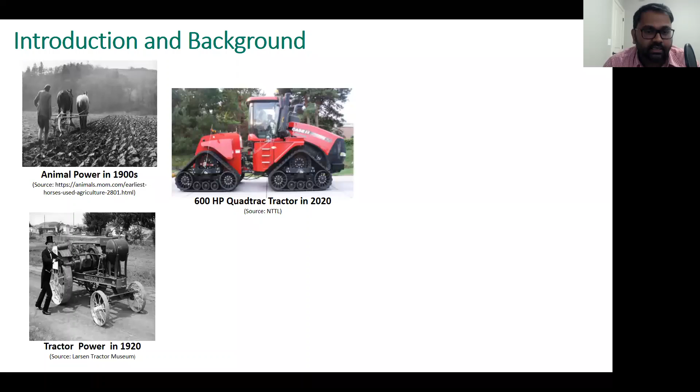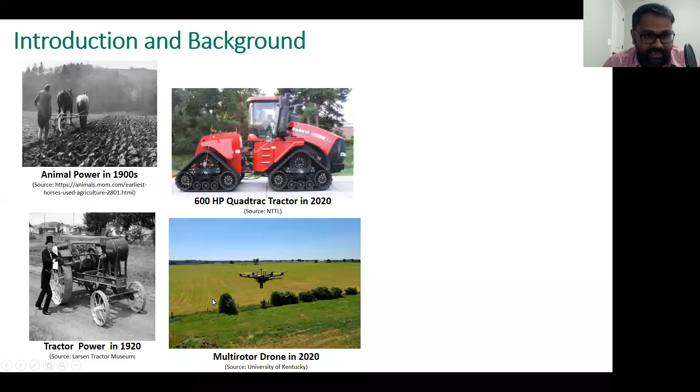Today machines that are offered come with the option of connecting to the cloud, and also these can do auto steer very precisely with RTK GPS accuracy. We're also now using drones or unmanned aerial systems that can easily fly over fields to observe crop conditions, look at crop corn plant stands, and we're also using them for weed identification. So those are some of the examples.

So how are the machines going to look like in the future? We are looking at machinery, something like these on the top right. There could be robotic machines, some of them smaller machines that can go underneath the crop canopy, and some of them high clearance robots. There could also be drones that are actually spraying in the fields. Here you can see an example of a weeding ground robot in a vineyard.

And these are just very few examples of many robotic platforms that are under development, both at research institutes, but also in OEMs and startup companies. There's a comprehensive list of these robotic platforms at the link here.

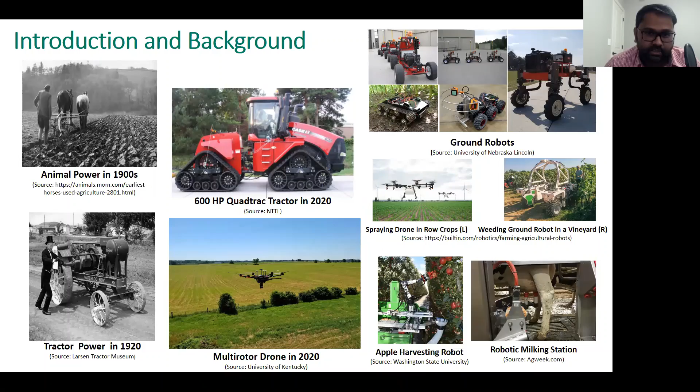When we look at orchard crops or specialty crops, we have apple harvesting robots and robotic milking stations. So as you can see, there are a variety of robots used for both crop production and animal agriculture. Here's a broad classification of agricultural robots.

These are divided into unmanned ground vehicles, unmanned aerial systems, and robotic manipulators. UGVs are used in both row crops and specialty crops. UAS are used primarily for sensing, but now we're looking at spot spraying or targeted chemical spraying. Robotic manipulators are predominantly used in greenhouse and phenotyping applications, livestock, and specialty crops. Robotic manipulators are nothing but robotic arms.

Robotic milking stations are a mature technology that have been used for many years. So you could see a combination of these robots. For example, a robotic manipulator could be mounted in an unmanned ground vehicle for automating field operations.

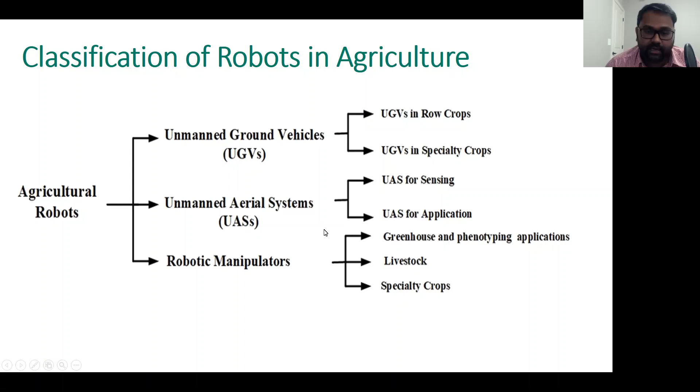Some of the computing is happening on the machine itself or edge computing devices, and some computationally intensive operations could be happening on the cloud. We have robotic manipulators that could be inside the barn, milking the cows, but also providing feed delivery or phenotyping the animals. So as you can see, there is a variety of robots that could be part of the connected farm of the future.

So where we are today with this vision, companies are offering autonomous grain cart solutions. As you can see here, this is a good example, a tractor pulling a grain cart, a typical 200 to 300 horsepower tractor. As you can see, there's no operator. The idea here is the combine operator can summon this autonomous grain cart so that you can autonomously transfer the grain and unload it at the edge of the field.

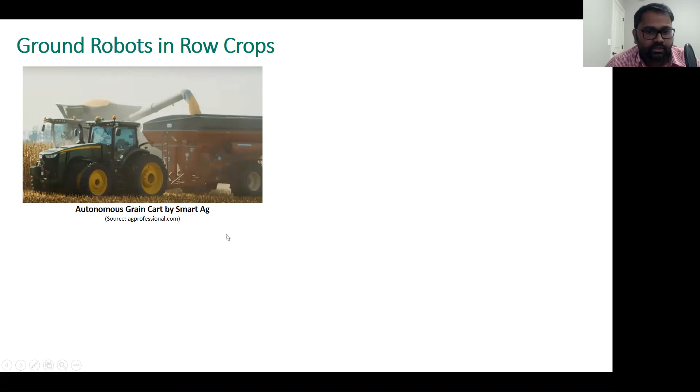So there are machines being offered that don't look like typical tractors. This is the DOT platform by Raven, a modular machine. You could use multiple operations with this type of machine. These two machines are in the range of 200 to 300 horsepower. So we're talking about high horsepower machines getting fully autonomous.

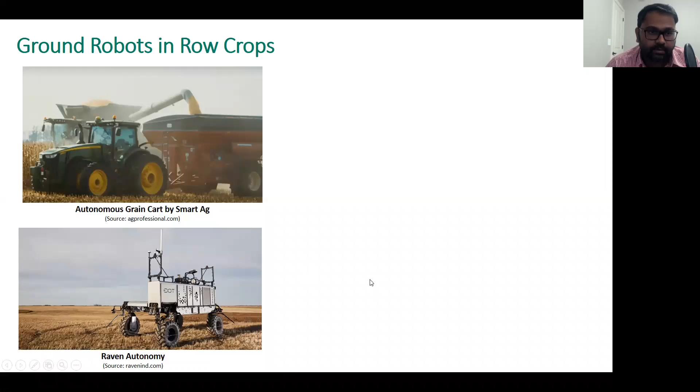There is work on the research side too at research institutes, and one example is this robot that we are working on at University of Nebraska-Lincoln. There are many robotic platforms that researchers are working on, which are electric machines. This robot has a 60 horsepower internal combustion engine—a more practical field platform that we are trying to develop.

This is used for collecting soybean plot information. Here we're using it as a phenotyping application. But since it has 60 horsepower, we could do other operations too with this machine.

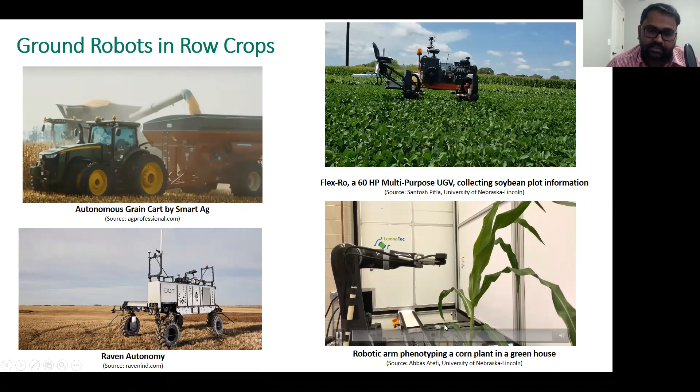We also are using robotic manipulators to phenotype corn and sorghum plants inside the greenhouse. The idea here is you can place this robotic arm next to a conveyor belt, and then we can do in vivo sensing. So here, this robotic gripper is sensing the chlorophyll content and the leaf temperature.

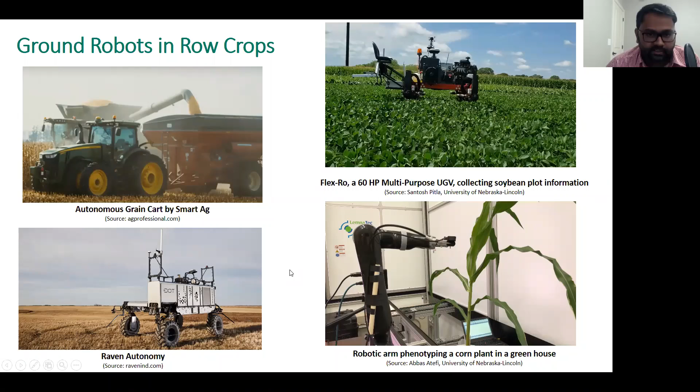So as you can see, there is work both from startup companies and OEMs, and also at research institutes on robotics for row crops.

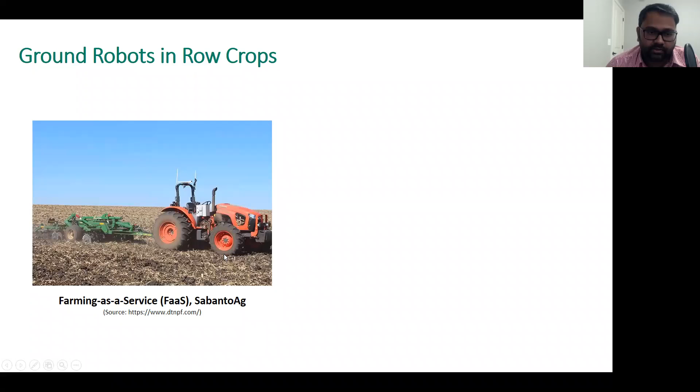So we are moving towards small autonomous machines. Here's a good example, this is by SabantoAg, a small robotic tractor. And then here we are using a swarm of machines, multiple ground robots. The idea here is replacing one big machine with multiple smaller machines.

And the motivation for that is the ability to reduce risk. For example, if you have 10 machines working in the field, even if one machine is down, the remaining 9 machines can still work. So that's how you're managing risk. There are also benefits in terms of reducing soil compaction. So that's been the motivation to go small but use multiple machines.

And something that is coming up is farming as a service. So instead of the producer buying these machines, these companies are offering this as a service, like a custom operation.

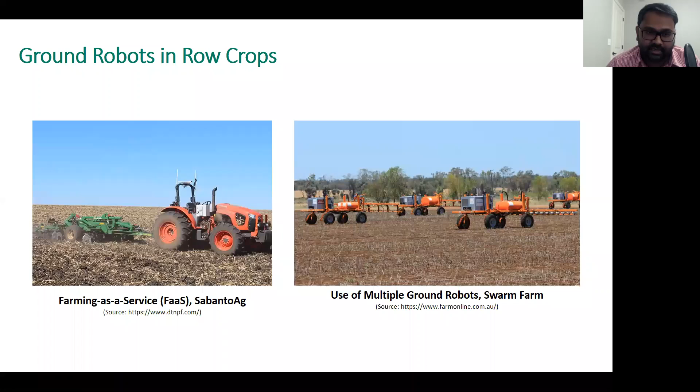In terms of aerial robots in row crops, predominantly we have seen work in the area of sensing crop and identifying crop stress. Here's an example: a multi-rotor UAS collecting information from soybean plots.

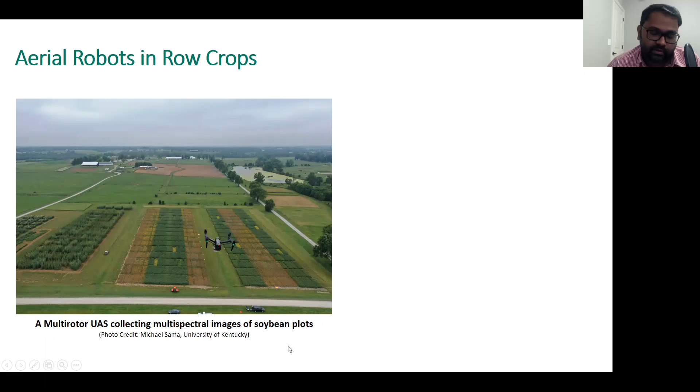UAS has been used for corn population counts and weed identification, with a lot of machine learning and AI techniques used to differentiate between crop and weeds. With the increase, UAS are advancing at a really fast pace, and now companies are starting to offer drones that can actually spray, handling higher payloads.

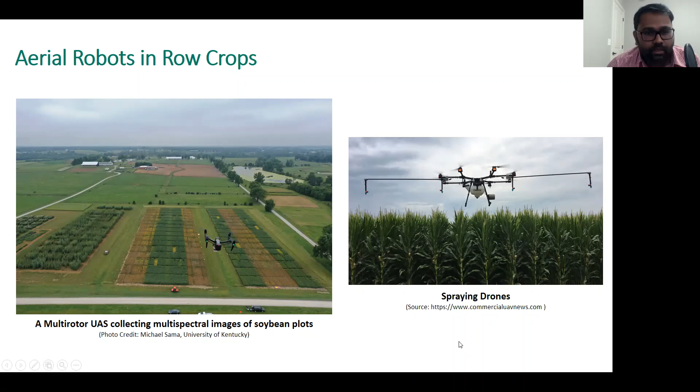When it comes to robotics in specialty crops, like orchards, one of the biggest challenges is availability of seasonal labor for harvesting. So there's a lot of work in automating the harvest process or fruit picking. In this example, a robotic manipulator is mounted on a ground vehicle, which could be a ground robot too, that gets close to the tree and the robotic arm picks the apples.

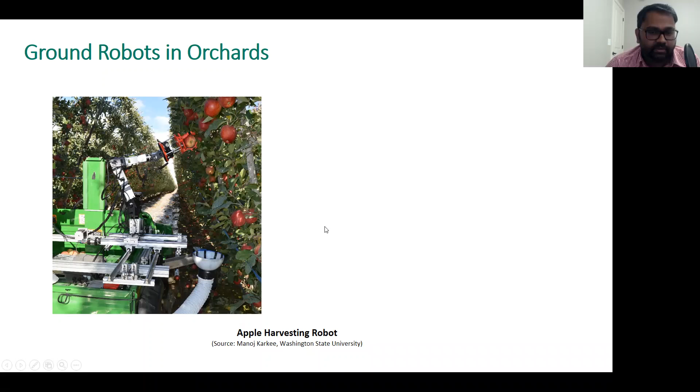One important thing is when you're picking, you shouldn't damage the apples, so you have soft grippers. Another challenge is occlusion, which is one fruit being in front of another. The machine has to use really good algorithms and machine vision techniques to differentiate between the two fruits and pick the fruit. Because of this computationally intensive process, these robots are still slower than human labor - humans still pick faster than robots can. That's been a challenge.

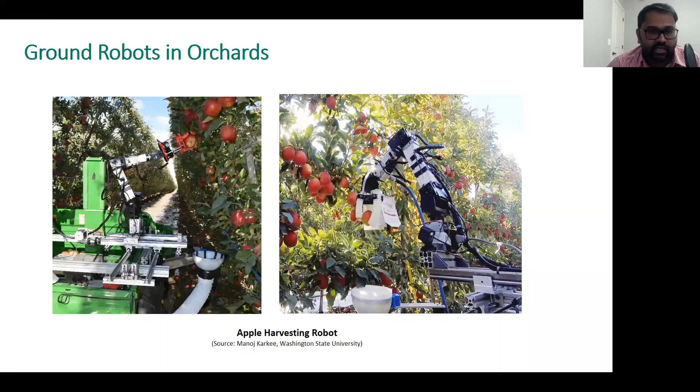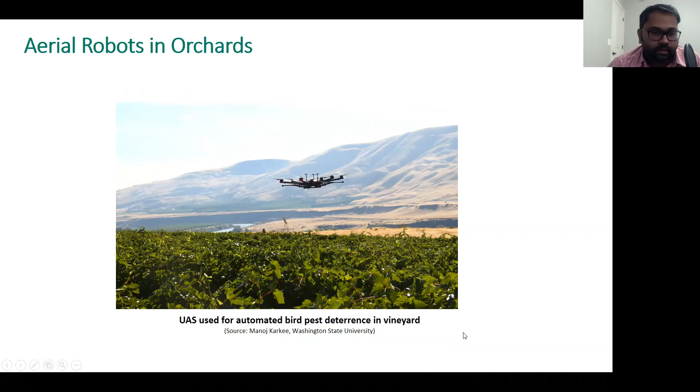UAS are used for some specialized applications, such as this UAV trying to deter bird pests in a vineyard. With the advances, there are a lot more applications coming up using UAS for crop production.

I'll go over some challenges here, for ground and aerial robots in row crops. The technical challenges include designing effective control architectures and AI algorithms, not only for operating one individual UGV, but also a fleet of UGVs. How do we distribute tasks among multiple UGVs? Are they doing the same tasks or different tasks? There could be humans in the loop, or without humans working with the robots.

There's a lot of work, and this has been a hot research area. And designing and deploying robots to work faster and more gently than human labor when interacting with both plants and animals.

Some socio-economic challenges include the fear associated with robots in terms of replacing human labor, and also what is the economic feasibility of both large and small acreage farms - a large producer versus a small acreage producer. What is the economic feasibility of robots? And then liability, security, and data privacy concerns associated with ground robots. These are still up and coming, so there's still a lot of work needed in this area.

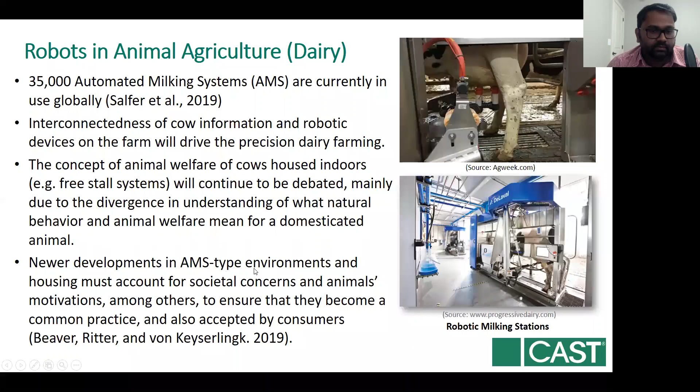In terms of robotics in the animal industry, there are 35,000 automated milking systems. Robotic milking stations are a very mature technology and have been used over many years. One issue in this area is the debate on animal welfare of cows in indoor environments. Hopefully automated milking stations will take into account some of these societal concerns as we move forward with deployment.

Coming to the poultry and swine industry, robots are being developed to pick eggs laid on the floor, and also to turn the litter and sanitize the environment for the poultry industry. In pig production, robots are up and coming - here is an example called BoarBot. This robot will put the pig on a leash and can take the pig around the pen, especially during the breeding season.

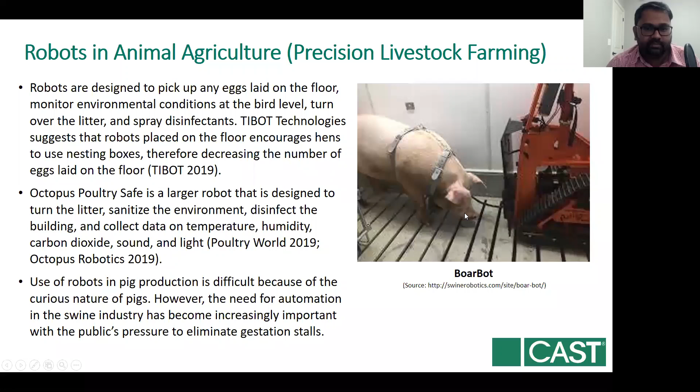And big data and cyber infrastructure. This is a really important factor, not just for robotics, but for the whole ag ecosystem. But think about robots that don't have operators on them. There'll be more data generated by the machines. So that's why big data and cyber infrastructure is going to be key.

And farm connectivity is going to be an important one, primarily for logistics. So if a robot is out of seed or fertilizer or chemicals, it needs to communicate that with other robots or to a remote entity, so that the material logistics can happen.

And then interdisciplinary workforce. So now we're at a stage where we're working on different robotic machines, both at research institutes and startup companies. In maybe 10 years we'll have robots and we will have workforce needs. So our traditional agriculture curriculum needs to consider this and prepare our workforce for these future needs.